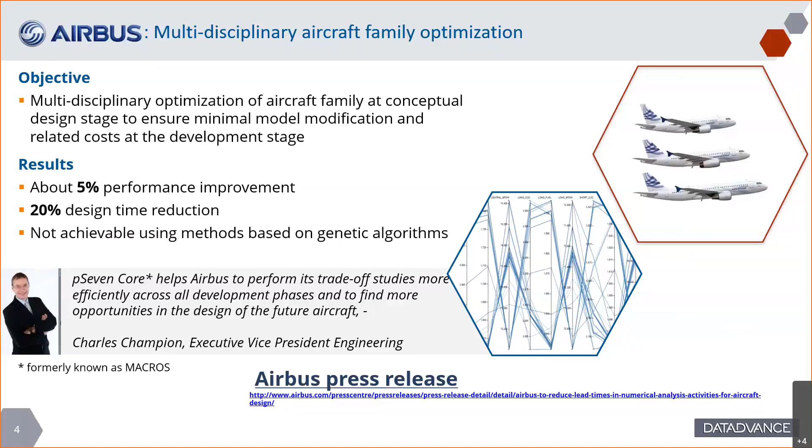Meanwhile, as I said, we expanded in other industries. So I just wanted to share with you some successes that we had with, for example, Japanese automotive companies. So we have many references there. One of them being Mitsubishi Motors, where our predictive modeling technology allowed them to build some predictive models for combustion engines and export them into neutral formats, so that these mathematical objects representing the combustion engine are then subsequently used in a 0D, 1D simulation environment, so a multidisciplinary environment for acoustic simulation. It was the use case.

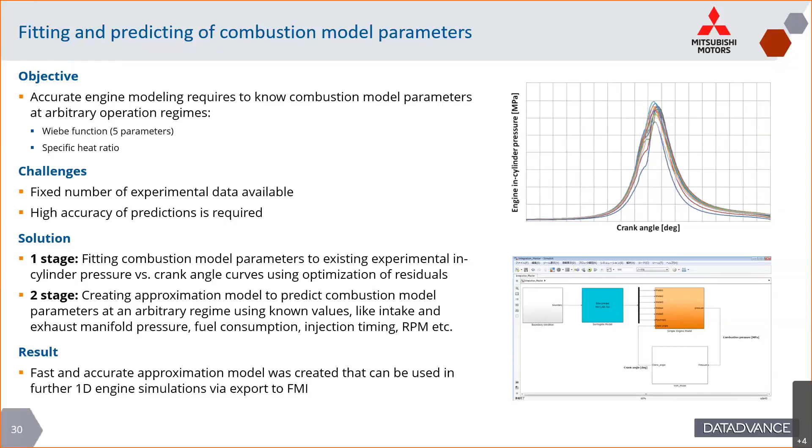We've done that because pSeven indeed allows you to export in neutral format, such as FMI, for example, or an Excel sheet or C program. Another nice use case in automotive is a well-known and challenging benchmark called MOPTA 08. I think it was invented by General Motors back in the days in some US universities.

The challenge here is to tackle a very high dimensionality optimization problem with more than 100 variables and 68 inequality constraints, but within a given budget. And the budget, considering the dimensionality of the problem, it was crash simulation, is very small. You see, it's less than 2,000 points for such an amount of variables. It's definitely small. But thanks to our technology, we were able to tackle that problem and actually find the optimum value in an amount of points which is less than this total budget. So with 1,600 or so iterations, we can get to the optimum. That was a nice success.

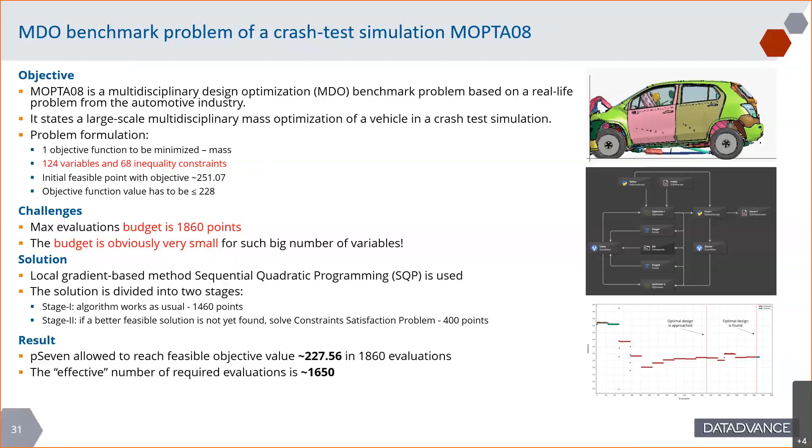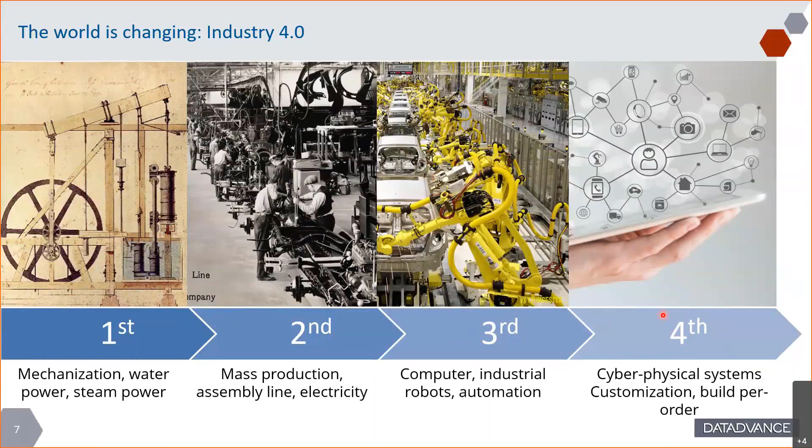So let me speak about the technology itself and what is different with our solution. So we fit in the fourth era, the era of cyber physical systems. In that era, you need to provide software technology enabling, for example, the collection of data from an assembly line or a system in operation, then check that data against predictive models and potentially take some corrective actions if something goes wrong, or to enhance the performance of the system. So you have software discussing with hardware, and all of that managed by algorithms and artificial intelligence, for example. So this is where we fit.

So these models are of course the know-how in the company, and we know how to build some very high quality models, with a level of fidelity which is very, very close to what you can get using a 3D simulation or even test. So these models are built, as you can imagine, from data and using machine learning and artificial intelligence.

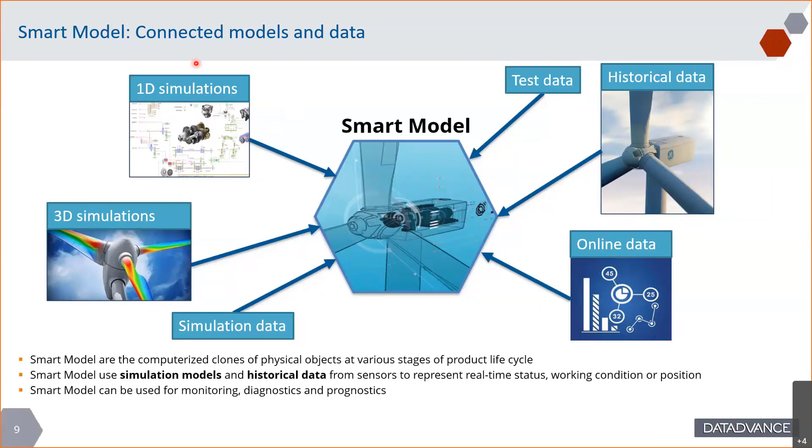The data set you can use might come from existing data, historical data, or you can, of course, generate such a data set by running simulation. And for this, you need, of course, a workflow engine. So that is a good transition to the main capabilities of our technology.

So we develop a product called pSeven. pSeven is an engineering process integration framework, which embeds also design space exploration capabilities and machine learning capabilities. So the main pillars are these ones. So you have a workflow engine enabling the capture of any engineering workflow. It has to be very flexible, as you can imagine, so that you can capture any workflow, whatever the software, the zoo of software that you might need.

Then we provide design of experiment capabilities. So how to change all the parameters of the system and assess various combinations of these parameters in an efficient way to minimize the number of evaluations, so that in the next step, using machine learning techniques, we can produce some predictive models. And these predictive models can be inserted into the design process, which can be more global. In that design process, you might find then optimization capabilities.

So this is where we are very strong. We provide optimizers that can find the local, the global minima with a very limited number of evaluations, because in some cases they are extremely expensive and you cannot afford having thousands and thousands of simulations.

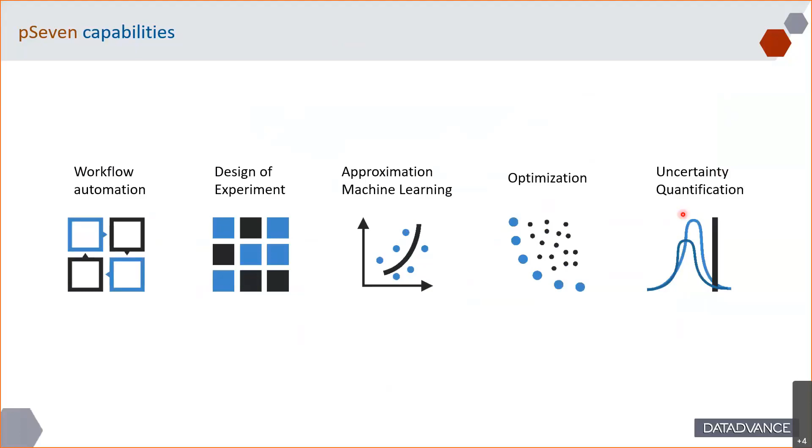We also provide uncertainty quantification capabilities, so that allows you to introduce some variability or uncertainty in your system and observe the propagation of that uncertainty and what is the effect on the key performance criteria of your system, so that you can better control it and potentially optimize.

Talking about the product line. So we started with algorithms. Our roots are pure mathematics and algorithms. So the first product that was on the shelf was pSeven Core. This is a Python library. Then 2 years after that, we released the framework. So this is a graphical environment. You will see it today, where you can capture your engineering workflow and run all these algorithms.

And finally, last year, so this is quite a recent event, we have released this cloud solution now called pSeven Enterprise. So pSeven Enterprise is a brand new and native cloud architecture, which is derived, as you can imagine, from pSeven, to allow, let's say, collaborative work. I'll come back on this in the next slide.

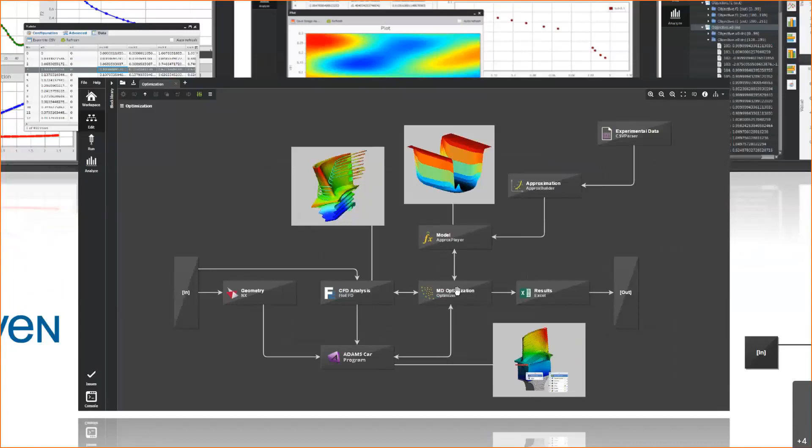So this is what pSeven looks like. The desktop version, at least, looks like this. You see here a typical workflow captured by the user, and this one combines, let's say, a CAD update with some simulation. Here it's maybe Adams. We have CFD simultaneously running. So this is really a complex multidisciplinary workflow.

And all of that is actually feeding an optimization block here. So the optimization block will take all the information coming from the various disciplines and of course search for the minimum of a given target. You see another branch here going to the optimization block. This is a pure machine learning branch.

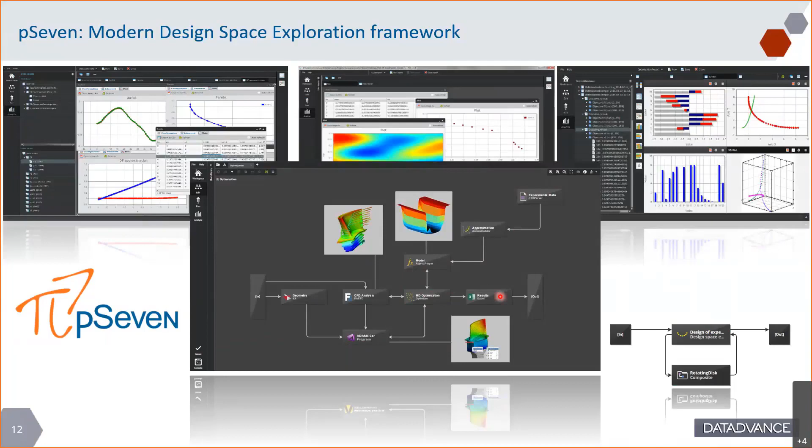So from experimental data, we train a model, and that model, this smart model I mentioned before, is actually executed in various configurations, and then it feeds the optimization block. So actually, the optimization block drives the execution of the model. And at the end, we get an optimum, and we export the results in an Excel sheet. So this is a typical engineering workflow and what you can do in pSeven.

As I said, we have since last year this extension of the technology to the cloud, and this is absolutely unique on the market. We have a native cloud solution here to not only execute workflows or to run some design space exploration task, but also to build the entire strategy and the entire workflow. So this is an authoring and collaborative authoring environment. It works like Google Docs or Google Sheets. So you might have several users connected simultaneously to the same workflow and working together.

So it extends the pSeven desktop application in various ways. Collaborative aspects, of course, is the main one. But because of the nature of the architecture here, the users can, for example, run many workflows simultaneously. So all the workflows are delegated to the server, which runs in the back.

The other beauty of the system is that once a workflow representing a given strategy or methodology has been captured in the system, in the cloud, then you can publish it as a basic app, which goes then in a specific area of the system called Apps Hub. So Apps Hub is a library of small apps which actually run workflows in the back, but the end user doesn't see the complexity of the workflow.

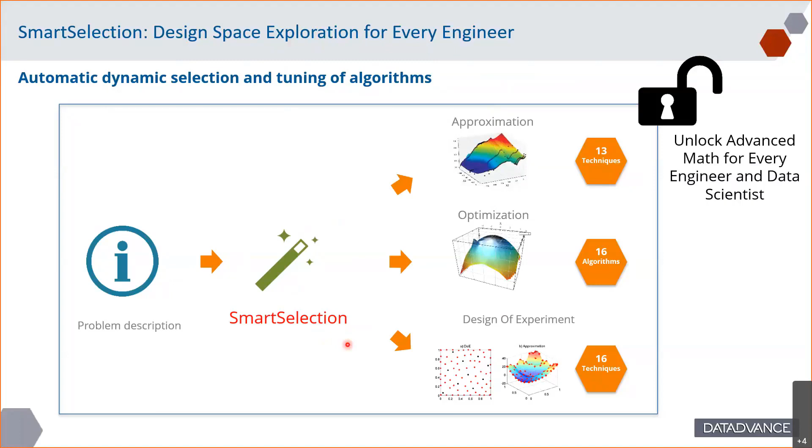pSeven is a quite modern interface, with an extremely powerful workflow engine. And this is what it looks like. If you use it just to run, let's say, a workflow, it's extremely easy to run. You just have to provide inputs here, and you will get some outputs there.

The workflow engine does not just run external applications. It's more than that. It actually runs applications in a distributed and heterogeneous IT environment. So there is a lot of work in the back to synchronize applications, to move files to the right machines, sometimes running on a cluster, sometimes on a local user PC, sometimes on a workstation. And we have to adapt to the zoo of software that might exist in any engineering environment.

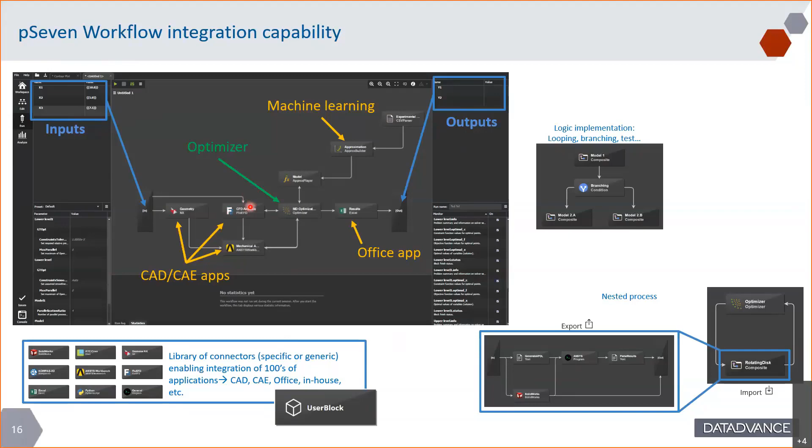Today, we will focus on Adams, but the type of application we can integrate is vast. We also have a user block concept, which allows you to define your own block that will go to the library of blocks. If this is a typical software, let's say an in-house development, or external software that you use very often, then you can have it in your library, and all the users will benefit from that block and can then build their workflow based on that application.

Before I pass the ball to my colleague Anton, I just wanted to introduce the use case. Using the features and functions I have described before, you will see first how we can integrate an application like Adams, more precisely Adams Car, into a pSeven workflow. Then you will discover how we can set up an adaptive design of experiment strategy.

And finally, you will see how we use surrogate-based optimization, known as SBO, to accelerate the optimization process for heavy simulation. Adams is a fast and efficient product, but you can extrapolate that to finite element, for example, which can take hours before you get a result. And this is where SBO is extremely powerful, because you can get to the optimum value in a very limited amount of runs and iterations.

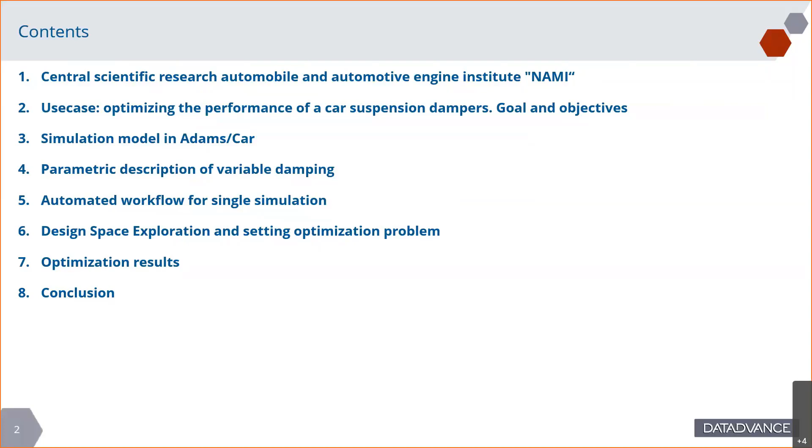And then we will switch to the more practical part with the live demo on how the automated workflow for single simulation works in pSeven, how we then apply design space exploration capabilities on top of this single simulation workflow, and what results we get for our optimization problem. And we will finish with conclusions.

So the project I will present today is the public version of the, as you can imagine, bigger project with NAMI, which is a Central Scientific Research Institute in Russia for the automotive industry. They cover all main areas of engineering services, starting from engines through bodies, transmissions, chassis, and even electronics and air conditioning and accessories.

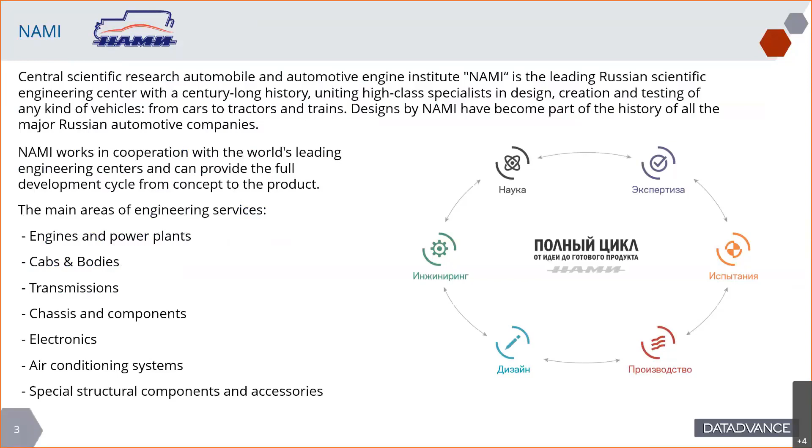NAMI intensively uses simulations in their design processes and consulting, starting from 1D modeling for system level design, multibody simulation, of course, finite element methods for crash tests, for stress analysis in general, and CFD methods for aerodynamics. And in this environment, our product finds its place as the platform to automate some of the simulations and unify them into single workflows.

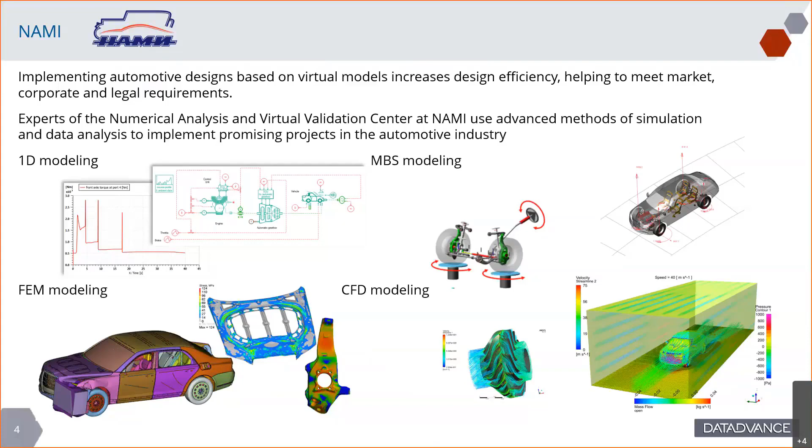I will skip this slide because I believe most of the participants are familiar with Adams and what it can do, and switch to the actual goal of the whole project and objectives we wanted to reach. And the goal is not only to solve the optimization problem, well, indeed, that's of course the most practically interesting outcome, but also to create an automated suite for parametric analysis of the car suspension to ensure the passenger vibration comfort under different vehicle behavior for different road profiles, and therefore to simplify everyday exploration of such problems.

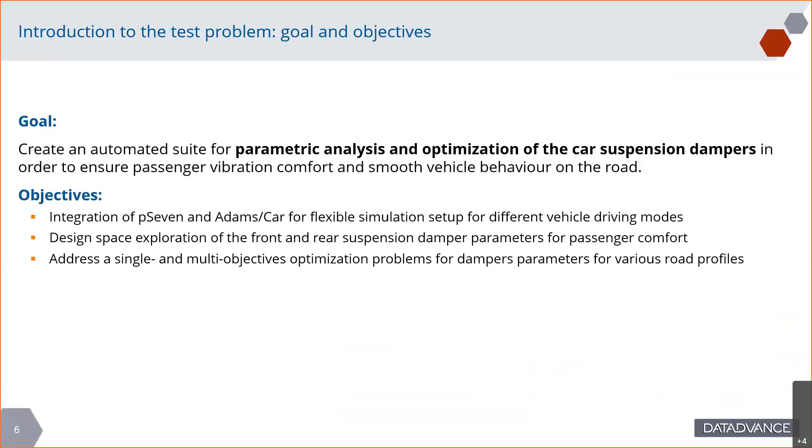So to reach that, we need to integrate the Adams car model into the pSeven workflow and ensure that we can do flexible simulation setup for different driving conditions. Then we need to apply design space exploration for our parameters of variable damping for front and rear suspension, introduce some responses we want to measure, which will represent the passenger's comfort, and as a final task, to address the single and multi-objective optimization problems and in fact identify the best combination of those damping parameters.

The model here is, for public purposes, based on the standard model from the Adams database. We consider two driving modes. One is the full road, where we provide the full profile of the road, incorporating the statistically meaningful obstacles and road behavior, and the single obstacle case, when we consider a particular fixed obstacle on the road, and therefore we can focus more on the detailed behavior for a particular case.

These two cases address two main investigation scenarios. So basic study of the damping for fixed conditions and, let's say, average performance for some representative road profile. We will see later on that we can combine those scenarios in the form of the workflow, and this is one of the goals of the project, to enable this smooth and simple switching between different studies.

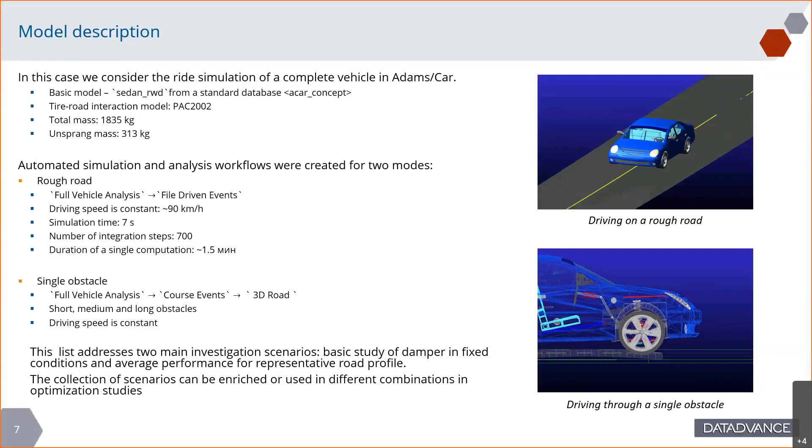Outputs. We want to investigate the passenger vibration comfort, and there are a lot of formulations in the literature, based on different expert knowledge, of how we can actually define those responses. In our automated workflow, we of course will obtain the outputs from Adams, which are displacements, accelerations, forces, distributions of energy densities, whatever things we can extract from our Adams model. And on top of that, we need to somehow define what we call passenger comfort.

Again, a variety of options exist, but we focused, at least in this demo and this public version, on several obvious things. We consider angular movement and acceleration, so pitch, also roll, and the vertical movement of the chassis altogether. And we consider the root mean square of these values over the time period, so over the driving period we actually simulate. That's what we will use mostly in our studies. There are other outputs which are also monitored, so saved for additional analysis if you want.

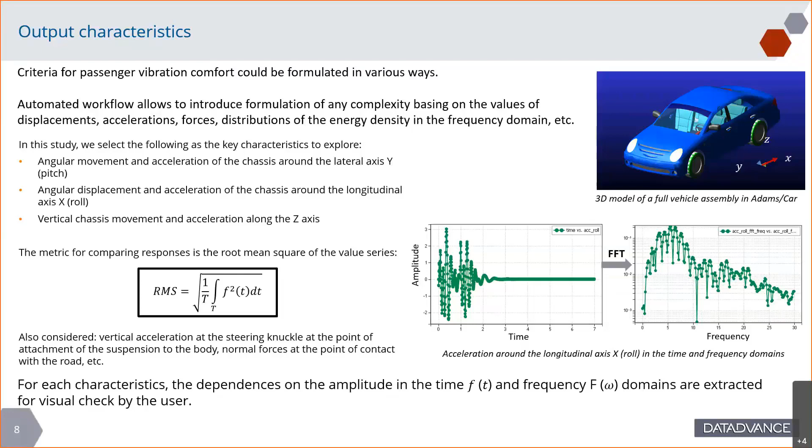And for each characteristic, we also perform a transformation to the frequency domain, and therefore we can analyze the amplitudes in the frequency domain, which opens the door for more sophisticated formulations of the problem, where we actually narrow the range of frequencies where we're looking into our responses.

Then the variable damping. So we introduced the variable damping coefficients as a piecewise linear curve. So we describe the dependence of the reaction force for compression and rebound as a function of the stroke speed. You can see in the plot that we have a piecewise thing where we introduce parameters for the slope for rebound, slope for compression, the point of inflection of this linear curve, and the maximum forces on both sides, which leads to 12 parameters in total.

Why stay with this parameterization? From one point of view, it's simple enough to be clear for everyone. On the other hand, it can provide really different shapes of our curve, thanks to the fact we don't consider it as symmetric, so we consider different slopes for compression and rebound. And you can also imagine that it can be extended to be even more non-linear, approaching the full spline concept, where we control more control points in our curve.

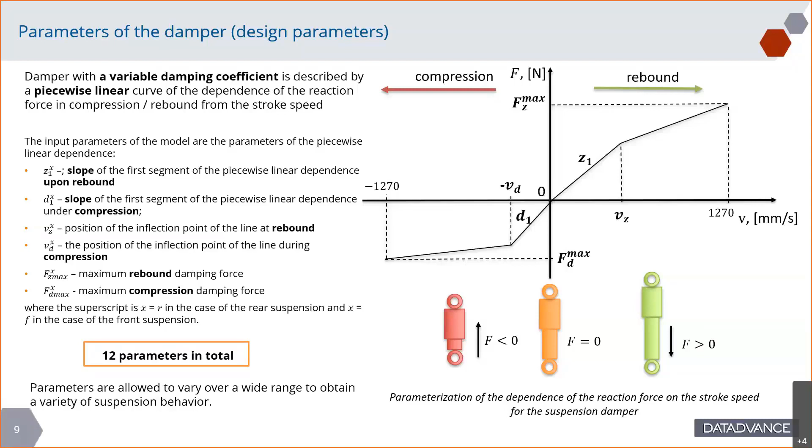One comment, I won't dive deep here, but of course, when we introduce our parameters as independent features of the curve, we can get many different curve shapes. However, we have bounding lines which are coming from technological feasibility, and we don't want to violate those bounds, and we also cannot afford to have the slope of the second line of this segment to be negative. This all will be represented as constraints for our parameter combinations, which we will need to satisfy.

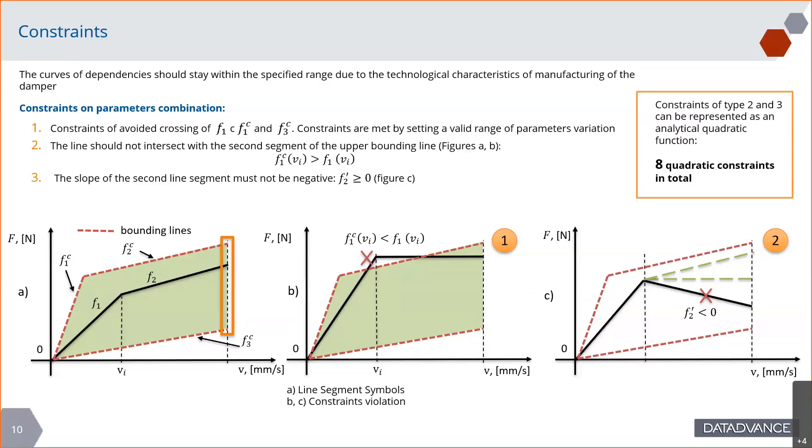Okay, that was the intro of the model. Now we need to actually switch to the study. What steps do we need to perform to solve an optimization problem in a pretty generic case? First of all, of course, we need to automate our simulation and obtain our automated source of responses to analyze them in an iterative way with different parametric study methods, design-space exploration methods.

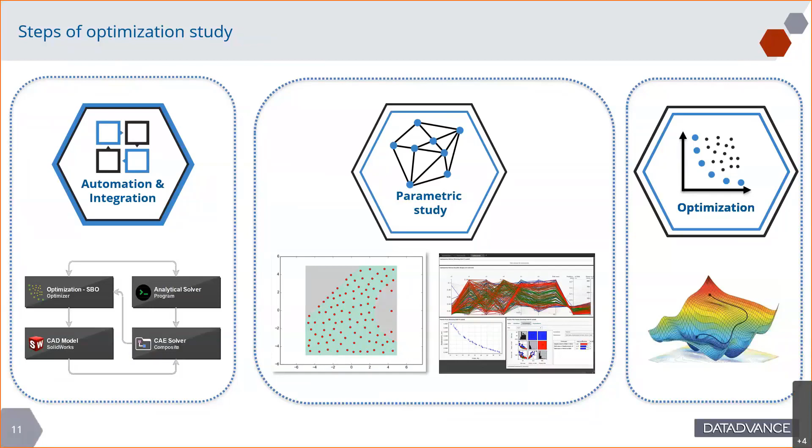Then we need to perform a basic parametric study just to ensure that our model is stable enough, that it behaves as we want, to investigate the basic dependencies, maybe reveal some important features that will help us to finalize our optimization problem statement and solve the problem we actually should consider. And in the end, we switch to optimization, where we have our targets to be improved, and we're actually looking for the best configuration.

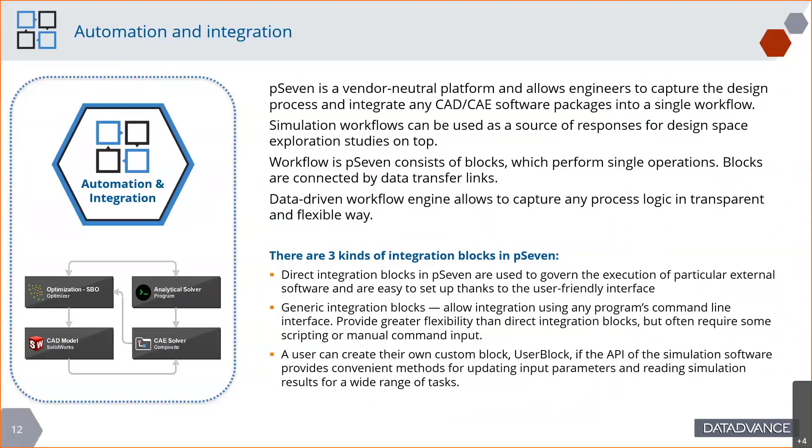I will skip this part about the workflow basics. Laurent covered that in his introduction, and I will just show you the workflow in general and switch to the live demo. So now I'm in pSeven. Somewhere in the background, I have my Adams model and all associated files I need to modify in order to set up my simulation. Here we utilize Adams in batch mode.

So we have the program block here in the center, which actually launches the Adams simulation from the command line. And in order to do that, we need to update the solver session file, where we change the road settings, the speed, the solver settings if we need to tune something. And we also need, of course, to update the definition of our damping coefficients based on the parameters we introduce as users. This is a workflow for a single run. So we actually should type in or copy-paste some parameters of our damping curve. And in the end, we will get our responses.

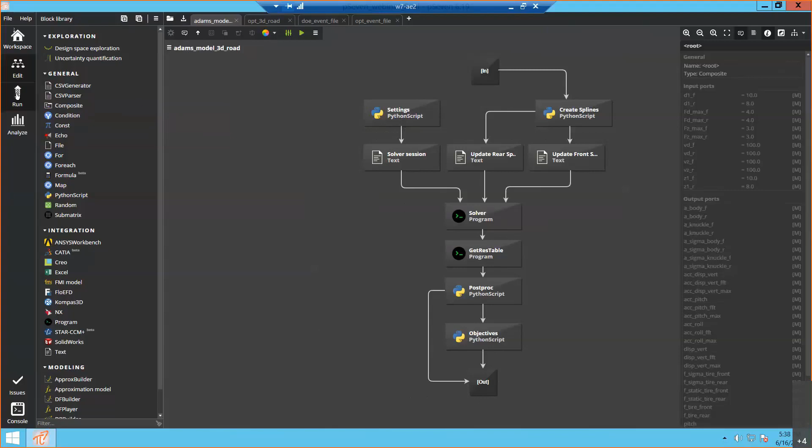In this place, I can edit my workflow. This is just a capture of the flow, and the links represent the data transfer and file transfer. And if I switch to the Run tab, I can actually see my inputs, where I can modify them, and the outputs I will need to get. I will probably modify something now. It's the maximum force. Again, it may be copy-paste, or here I will do it manually for these two values. And once I provided all the inputs for my damping curve parameters, I can run the simulation.

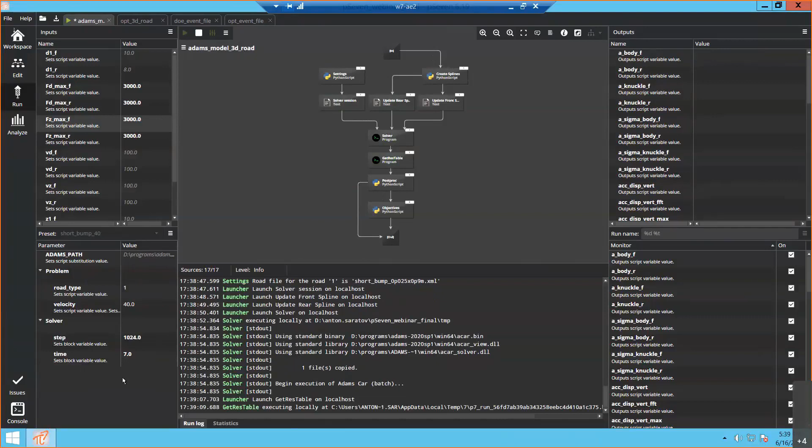And you will see that it just starts executing blocks. They are flashing. It means that their step is going on. We update our files, and we actually run the Adams solver in the background. It will take us some time. What else do we have here? We have this part where I have parameters. Those are not the definition of our damping curve. Those are more the settings of our study, including the path to Adams if I want to transfer the project to another machine. I have the road type, where I can switch by number between different road profiles.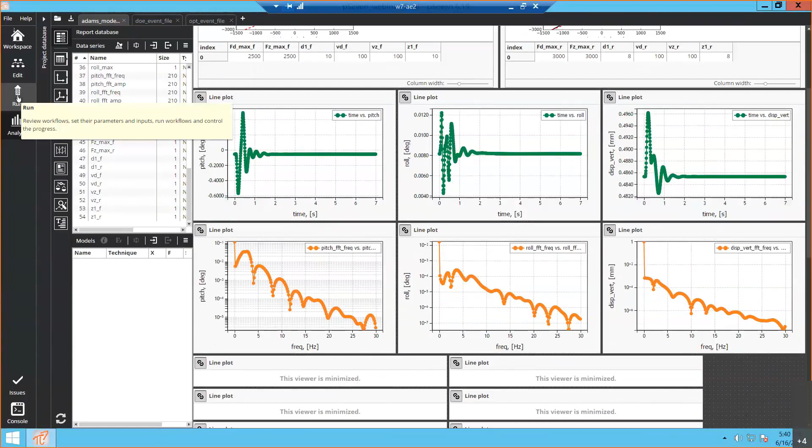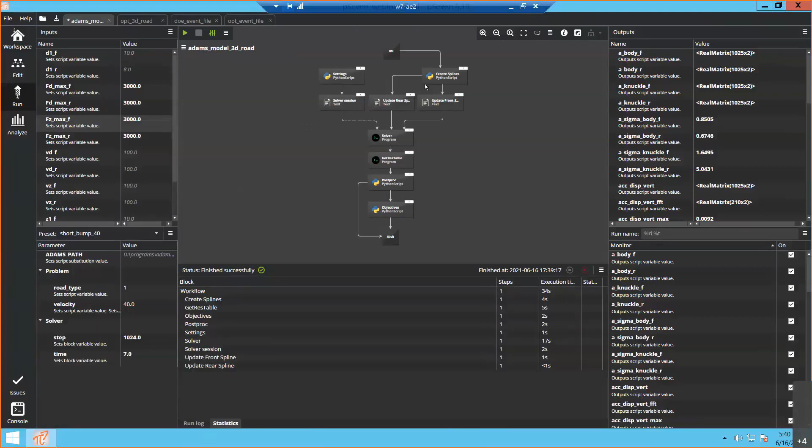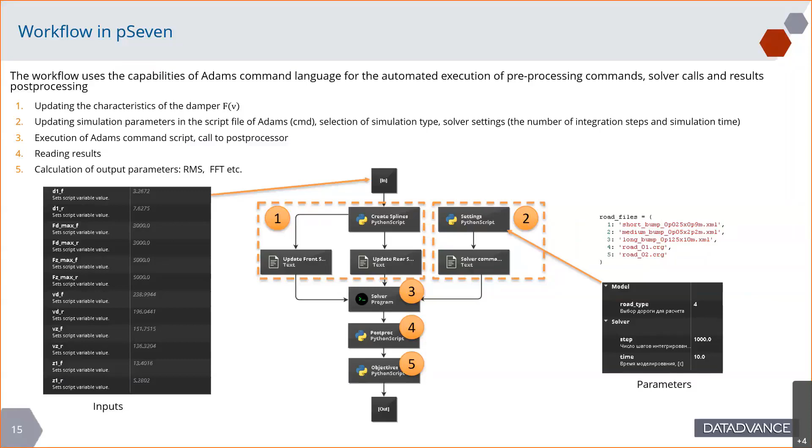So already this single study, single run, is useful because you can change all settings you promoted to be available here in the workflow, not actually changing the model in a visual way, and perform fast checks for different assumptions you have, let's say, in manual mode. However, of course, this workflow for us will be a basic brick for further study, which is design space exploration and optimization on top. So now we have our block, which gets our inputs, which we want to change and search for the optimum configuration, and provides the outputs we want to analyze.

So next step, design space exploration. This is a general concept. First of all, we will perform design of experiments, which is, in simple words, a uniform sampling in our ranges for variables, for parameters, in order to investigate how our responses behave, measure the sensitivity of the outputs with respect to the variation of inputs, and in general estimate our model behavior, get insights for the optimization problem statement, and even reuse the data we get during this step for surrogate-based optimization as initial sample.

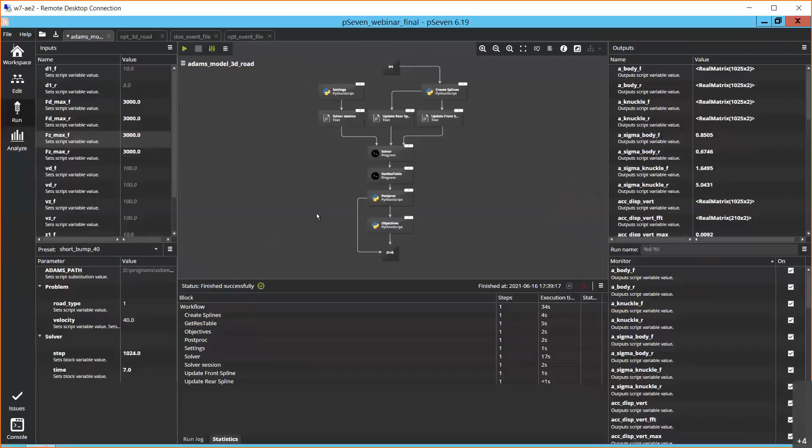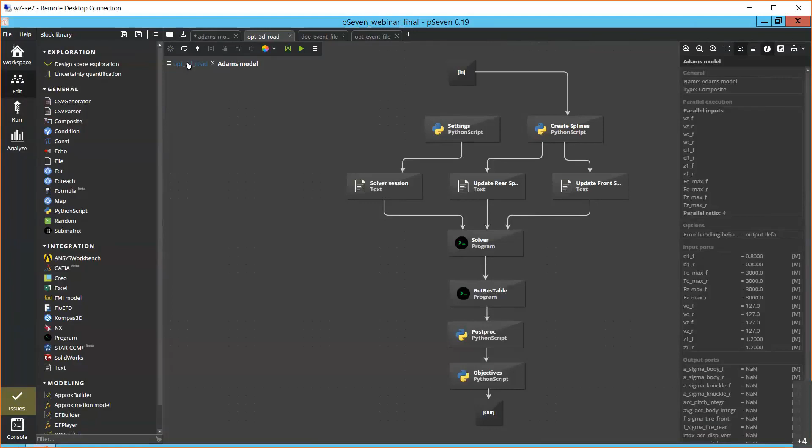pSeven provides many DOE techniques, and we have smart selection, as Laurent mentioned, to choose the most appropriate for the particular problem. Again, I will switch directly to the live demo and show you how the workflow for the parametric studies looks. And this is here. So what do we see on this screen? We see blocks, which are in fact folders. If I go inside this folder block, I will see immediately the same workflow we just checked. So we used the workflow for single run as the basic block for our cycle study, which is in this case DOE, which provides point by point and gathers responses from our model.

There is another block also here. It's called quadratic, and this represents the function which allows us to evaluate constraints which I mentioned. Those are auxiliary compared to the simulation, but really important because we want to have only the curves for damping which satisfy our requirements, which can be reproduced by technology. And it's all governed by this design space exploration block. And if I open it, I will see the main settings.

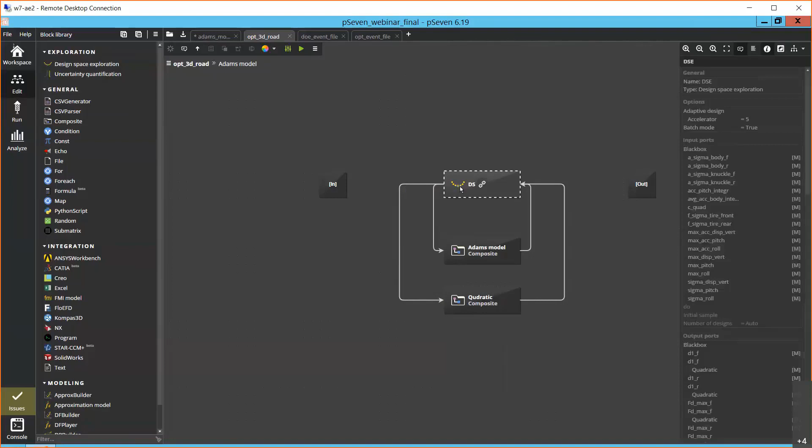So what do I have here? I have the list of parameters I want to change. I have the bounds for those parameters, lower, upper, and those are parameters describing my curve. They are considered as independent, as typical for any parametric study. They are all continuous. And here on the bottom list, I have all the outputs I produce from my model by calculating the sigmas and frequency domain sigmas, and they all have type evaluation. That means I only need to collect them and explore how they scatter in my design space.

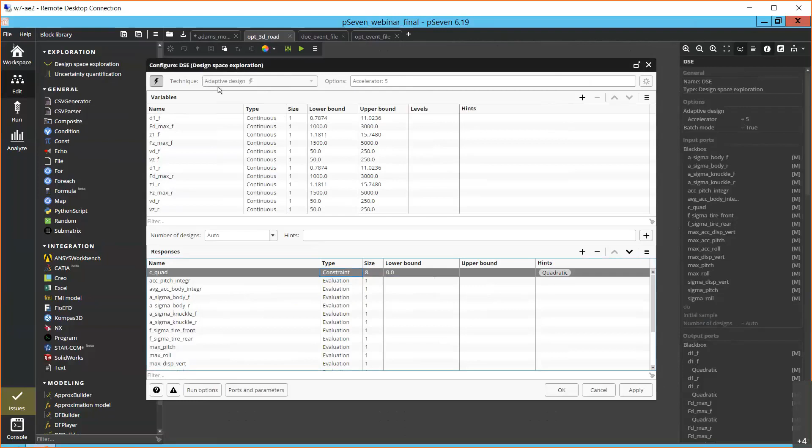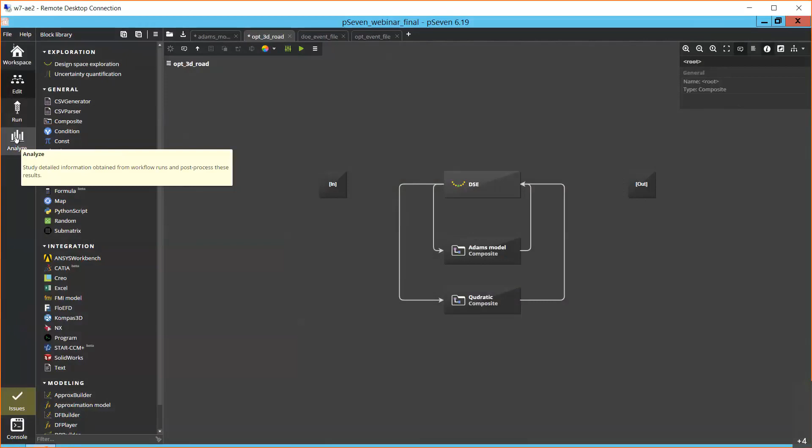However, here I have the first line, this quadratic constraint. So in order to ensure it will be satisfied for my design of experiment, I will just switch it to constraint. And you may notice that the technique for the whole study now changed to adaptive design. That's how smart selection works. You specify your problem, you specify what you want to do with your outputs, and you get the proper technique, which will then be tuned during the run, also automatically. That's it for the settings for adaptive design, where we will study only the combinations of parameters which satisfy our constraint for curve shapes.

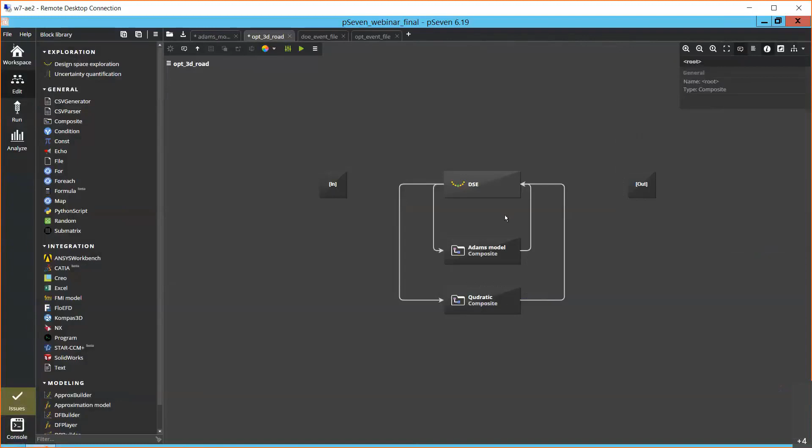Switching back to pSeven, how will we actually set it up in our block? Going back to edit, I will use the same workflow, same block, and actually all I need to do is go and find my sigma vertical displacement, sorry, where it is. Yeah, sigma roll. It will be my target for minimization, and sigma vertical displacement is also my target for minimization.

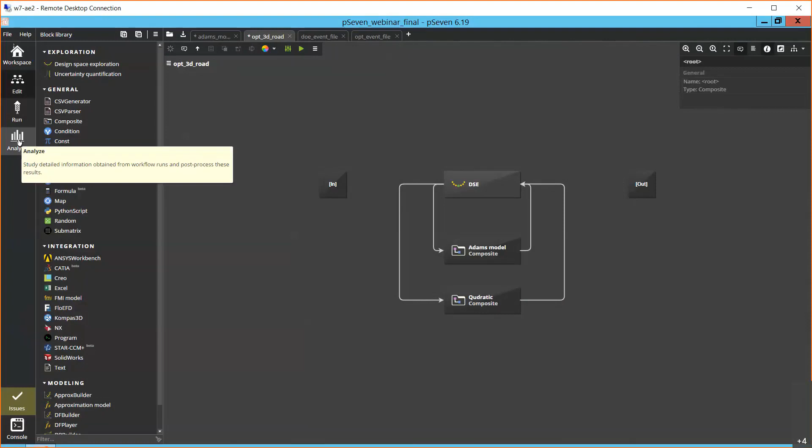I can add more targets, but it will be an even more multi-objective optimization study, which will be harder to analyze in terms of results. Or I can keep only one target, and it will effectively be a single-objective optimization problem. Thanks to the fact I promoted all of the outputs I measure to this list, I can play around with the settings and study different problems with a couple of clicks and some time for actual evaluation of the problem. So now I have my optimization setup ready with 2 clicks. I can run it. Well, it will take hours, so I will immediately switch to the existing report for optimization.

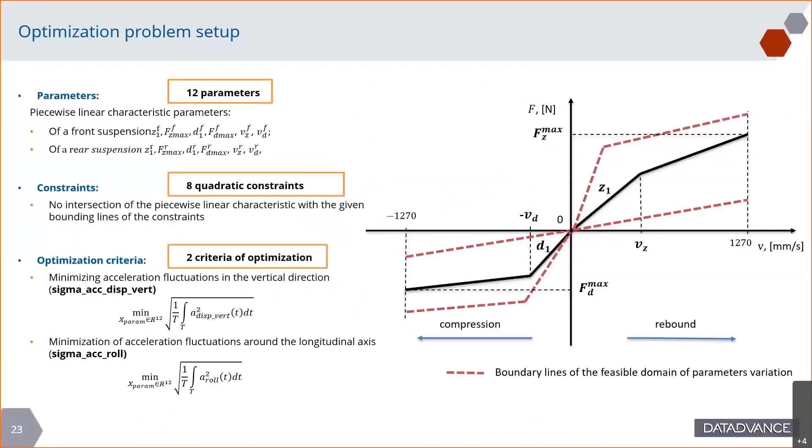So we applied, well, automatically selected by pSeven, a surrogate-based optimization technique. This is a global technique, which is more important for us in this case than the fact that it's evaluation saving, because simulation in Adams, as you noticed, took us about a minute. So we can allow multiple runs. However, we want to make a global exploration, and that's another benefit of SBO: it is by nature a global method. We discovered 36 Pareto frontier competitive points within 600 iterations, which is much less than you can expect from well-known gradient-based or even non-gradient methods.

And the overall computational time here was about 10 hours, which in fact was one of the goals of the whole story, to enable these studies to be performed overnight. So imagine at the end of the day, you formulate some assumptions, you run the optimization campaign, and in the morning you get a report which you just need to update and investigate what's going on. So thanks to SBO, it was possible.

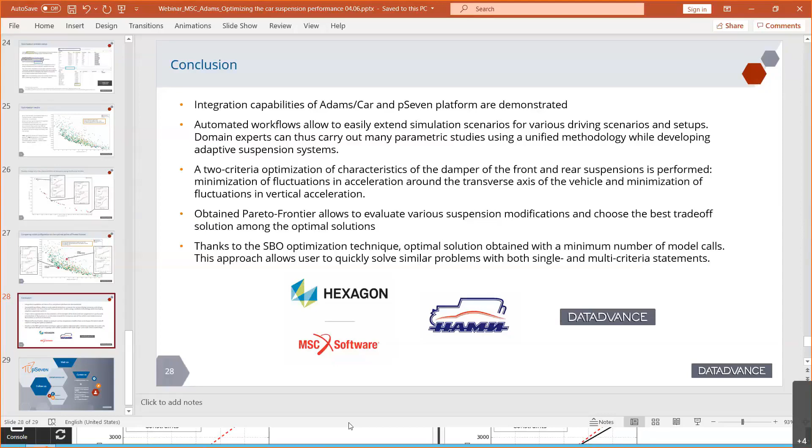There's another question that I've received. The question is, can you use pSeven to calibrate time-based responses? I'm guessing the user wants to take an output that varies in time and perhaps calibrate some of his model parameters to align with that response. Can you calibrate to a time-based response?

Yeah, let's consider, for example, this example which we have. Imagine I have this roll response in time, which is in fact the time-dependent response from the Adams simulation, and more or less almost all of the responses from Adams simulations will be time-dependent functions. And if I have a curve which I want to match, actually I can do it.

I can take this plot and add, in terms of workflow, another block which will compare the target curve to my generated curve, to form the target to minimize, the definition of difference between those two curves. And then the rest will be almost the same. We'll run the Adams simulation, get our time-dependent curve for a particular set of parameters, compare it with the target one, return the difference to the optimizer, and it will try to minimize it, which will be the match.

I especially pointed out that there will be a block which will calculate this difference between. Typically for real life problems, we should be careful in the way how we define this difference. So in many cases it will be a standard least squares formula, but sometimes we need to address particular parts of the curve with more accuracy, or incorporate the knowledge on the errors in particular measured points. But yeah, indeed, this is one of the scenarios, and definitely there's an optimization problem.